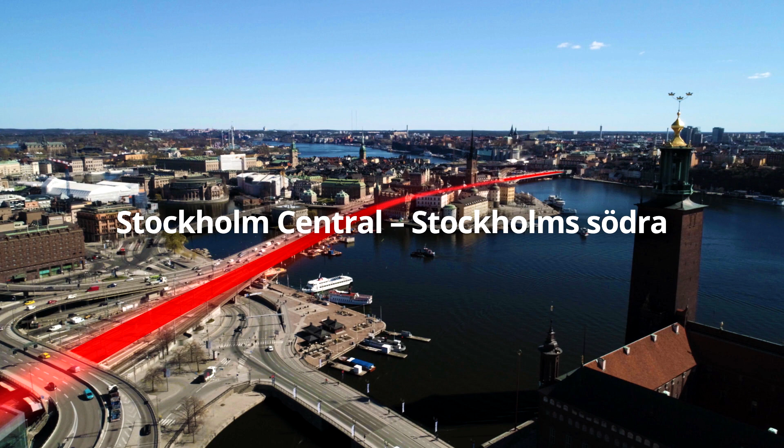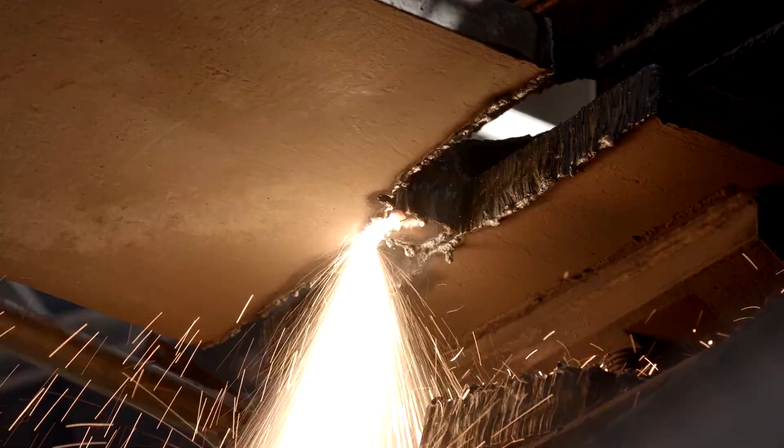Almost all Sweden's rail traffic originates or terminates in Stockholm. This makes the rail link known as Getingmidjan, or the Wasp's Waist, between Stockholm Central and Stockholms Södra, the busiest in the entire country. It's being upgraded and modernised for the trains of the future and the passengers of tomorrow. The investment is vital for the improvement of punctuality throughout Sweden.

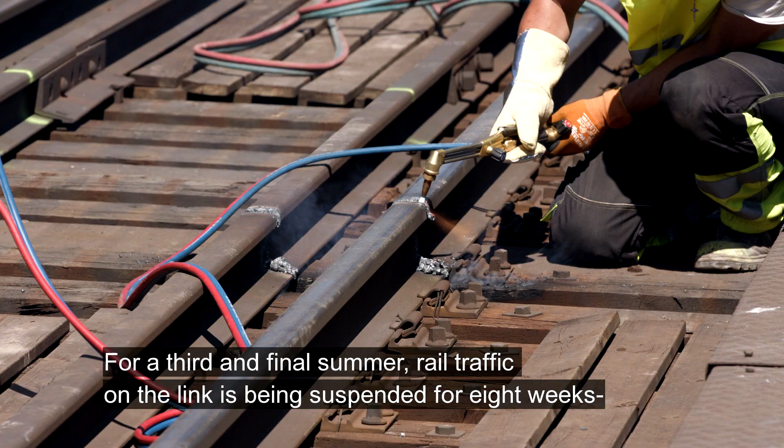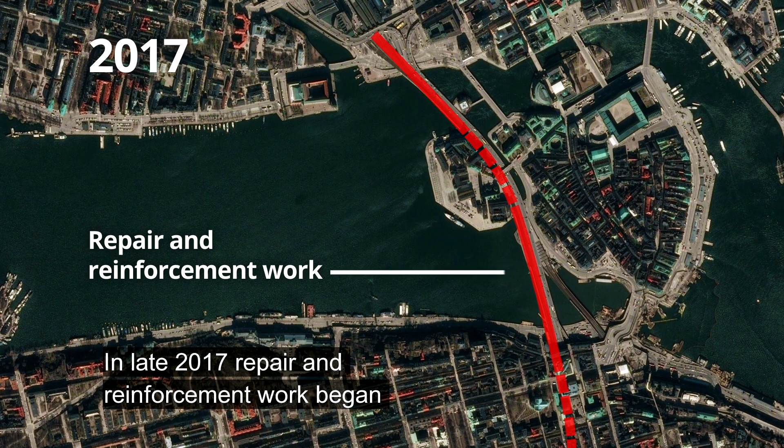For a third and final summer, rail traffic on the link is being suspended for 8 weeks to change the superstructure of the bridge over Norrström, the link's most critical and complicated operation. In late 2017, repair and reinforcement work began on the bridges over Söderström and Södermälarstrand, and in the tunnels under Södermalm and at Riddarholmen. In the summer of 2019, the rail bridges over Söderström and Söder Mälarstrand were replaced.

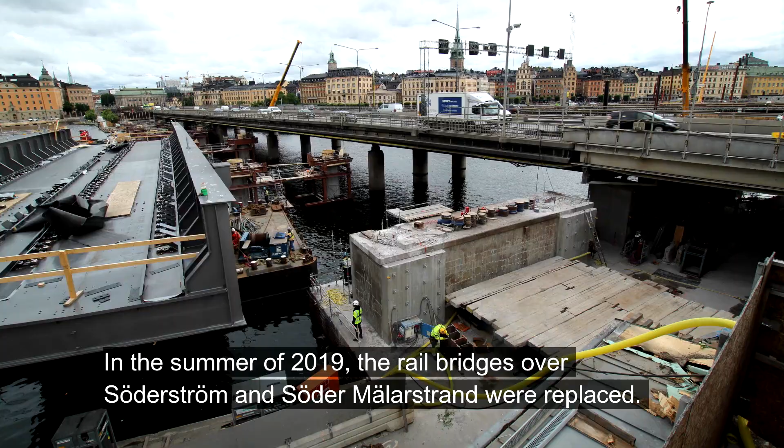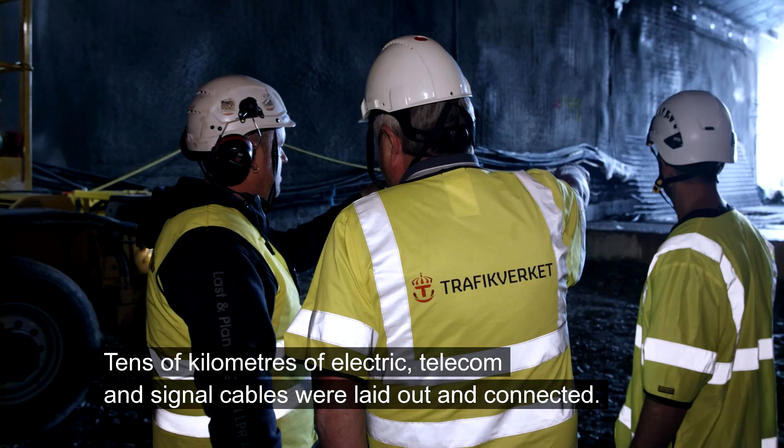The bridge over Söderström is 200 metres long and weighs 1,400 tonnes. Tens of kilometres of electric, telecom and signal cables were laid out and connected. In the summer of 2020, it's time to replace the rail bridge over Norrström between Tegelbacken and Riddarholmen.

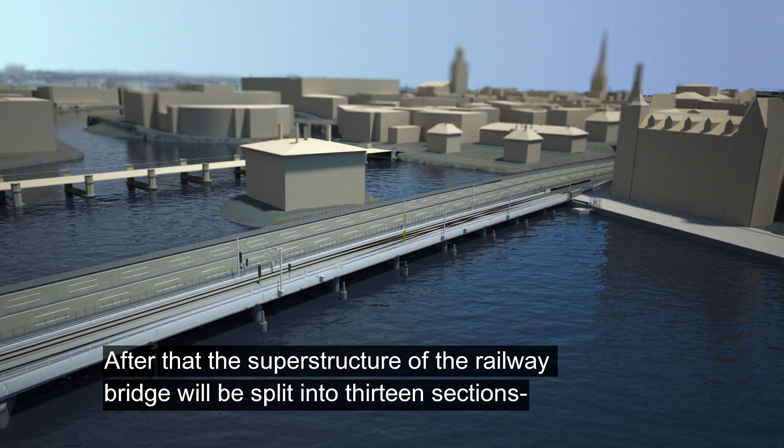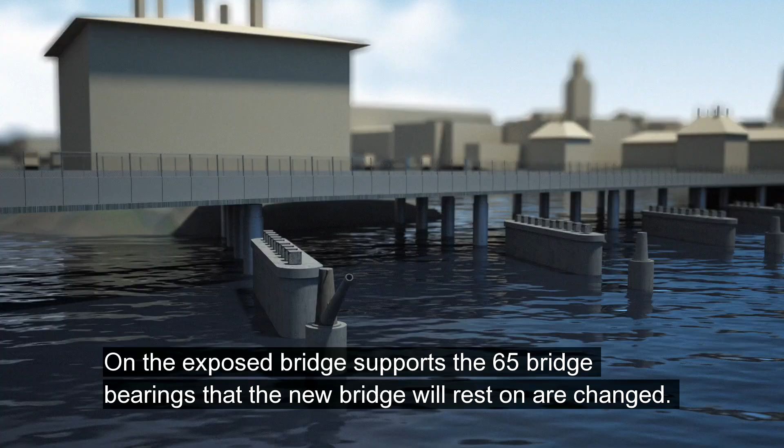First, the old pedestrian and bicycle bridge is dismantled. After that, the superstructure of the railway bridge will be split into 13 sections, then each lifted off using cranes and barges. On the exposed bridge supports, the 65 bridge bearings that the new bridge will rest on are changed. The new bridge was built in Tallinn, in 2 sections.

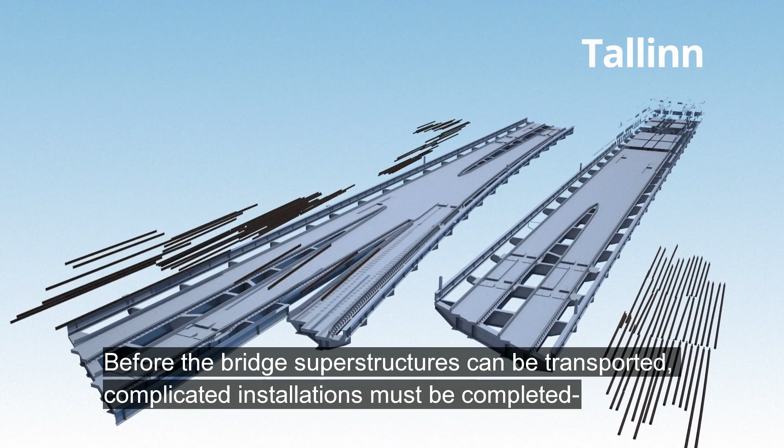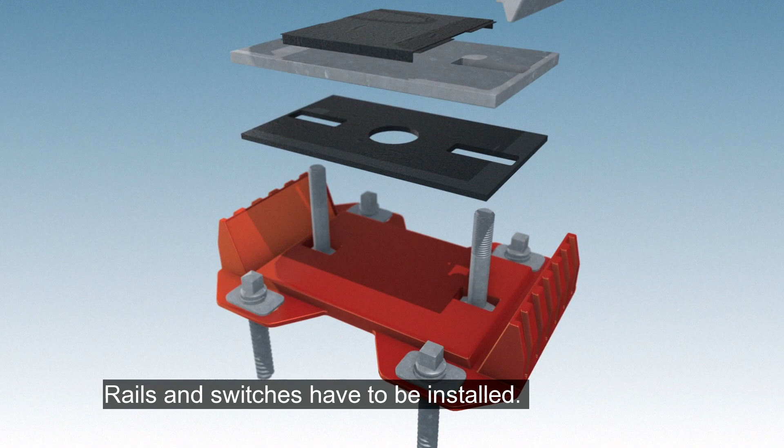Before the bridge superstructures can be transported, complicated installations must be completed. Vital preparation work before the arrival of the bridge in Stockholm. Rails and switches have to be installed. It's a challenge when 2,200 steel base plates must be fitted with millimetre tolerance to 10,000 screw attachment points.

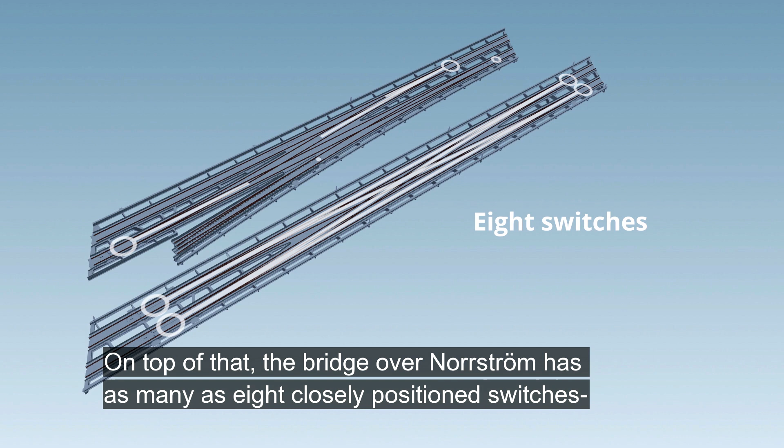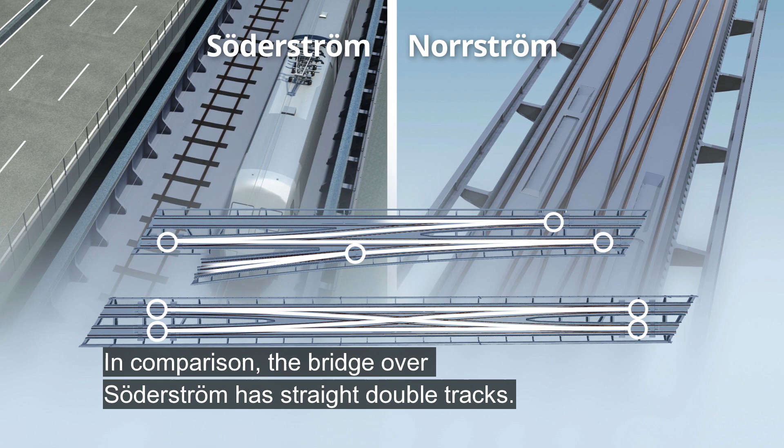On top of that, the bridge over Norrström has as many as 8 closely positioned switches. A world's first. A scissors crossover with 4 turnouts, a single crossover with 2 turnouts, and 2 single turnouts. In comparison, the bridge over Söderström has straight double tracks. These complex and adjustable parts further increase the difficulty level of the work.

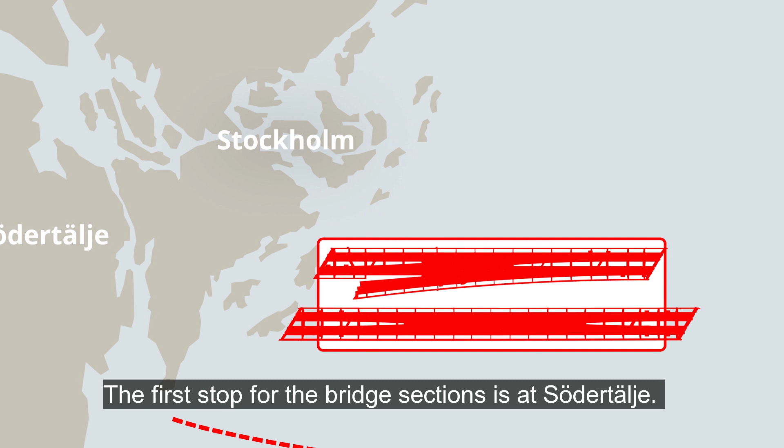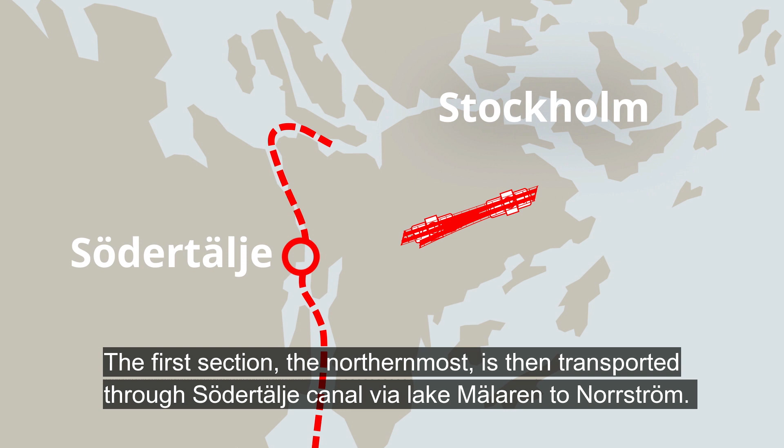The first stop for the bridge sections is at Södertälje. There they are loaded with the help of mobile trailers onto smaller barges. The first section, the northernmost, is then transported through Södertälje Canal via Lake Mälaren to Norrström. The bridge section is placed near the bridge supports.

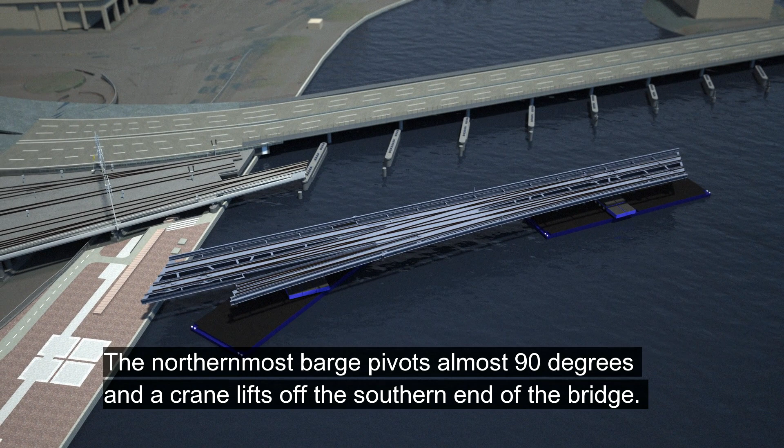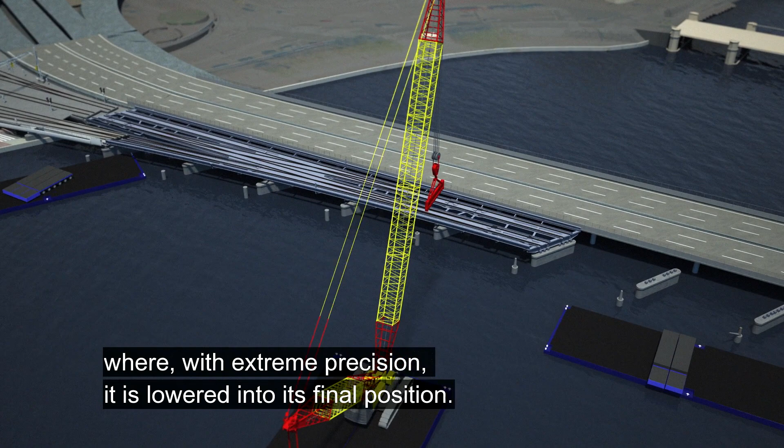The northernmost barge pivots almost 90 degrees and a crane lifts off the southern end of the bridge. Then the barge advances to the bridge supports. The southern barge is towed away and the bridge is manoeuvred in over the bridge supports, where, with extreme precision, it is lowered into its final position. The southern bridge section is installed in the same way, with barges and cranes lifting the bridge into position.

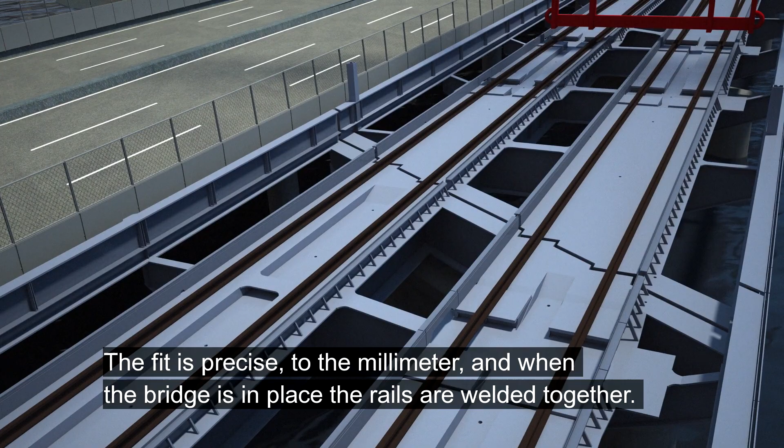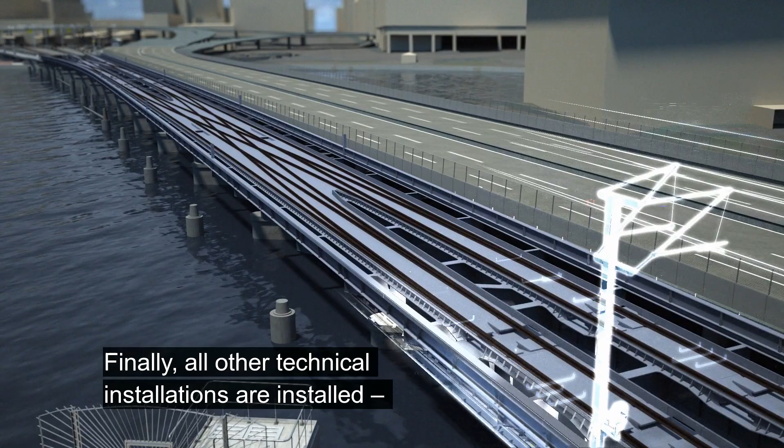The fit is precise to the millimetre, and when the bridge is in place, the rails are welded together. In the transition zones north and south of the bridge, the rail fastenings are cast onto concrete slabs. Finally, all other technical installations are installed. New signals, posts, signage and contact lines.

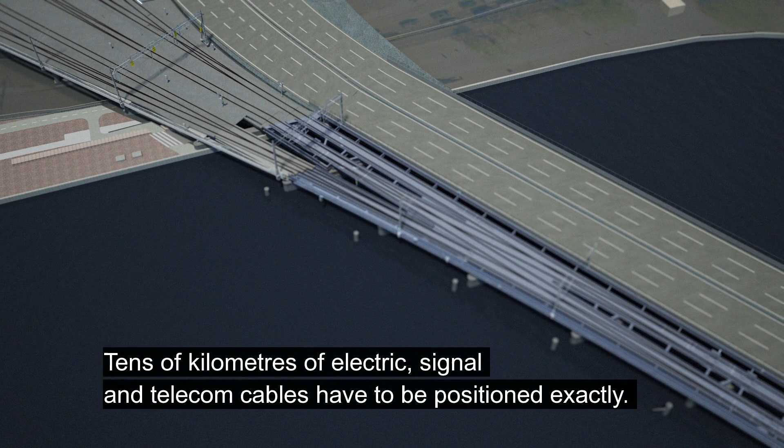In the tunnels, existing contact lines are replaced by rigid overhead conductor rails. Tens of kilometres of electric, signal and telecom cables have to be positioned exactly. 5,000 wires are connected to switchgear, signals and switches before the railway link can be tested and put into operation. It's a procedure that requires about 3,000 drawings.

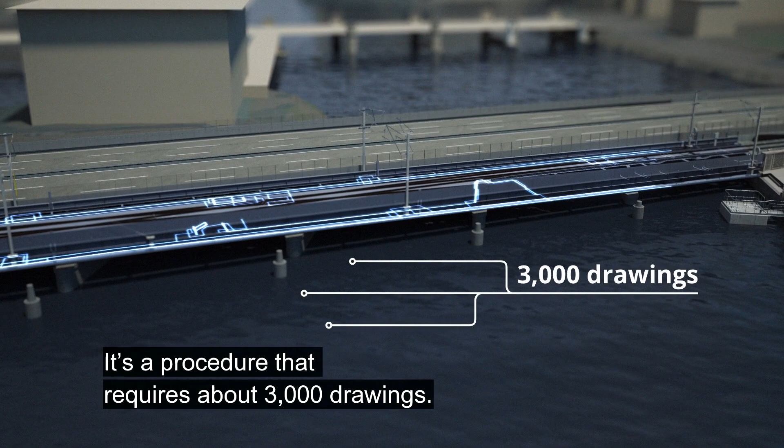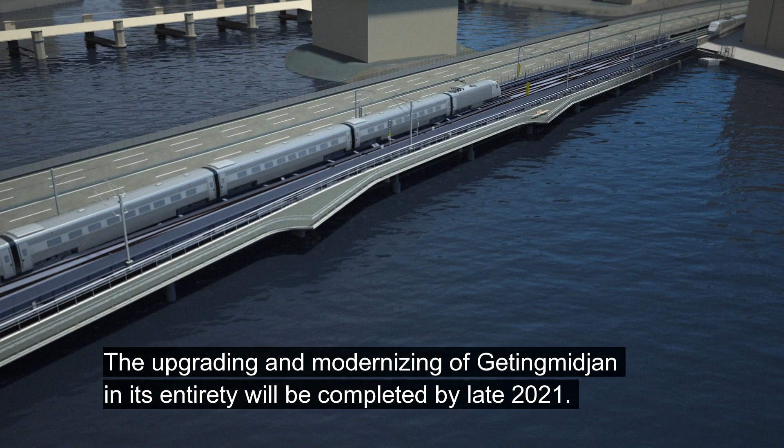When rail traffic is again underway, preparations start for the assembly of the new pedestrian and bicycle bridge, to be ready by the end of the year. The upgrading and modernising of Getingmidjan in its entirety will be completed by late 2021.

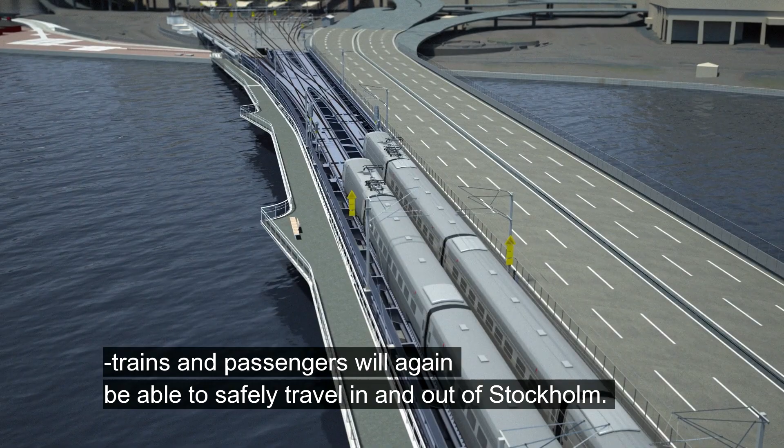After several years of meticulous planning and demanding work, trains and passengers will again be able to safely travel in and out of Stockholm. Sweden's most important railway link is getting a modern and future-proof upgrade and a new technical lifespan of 80 years.